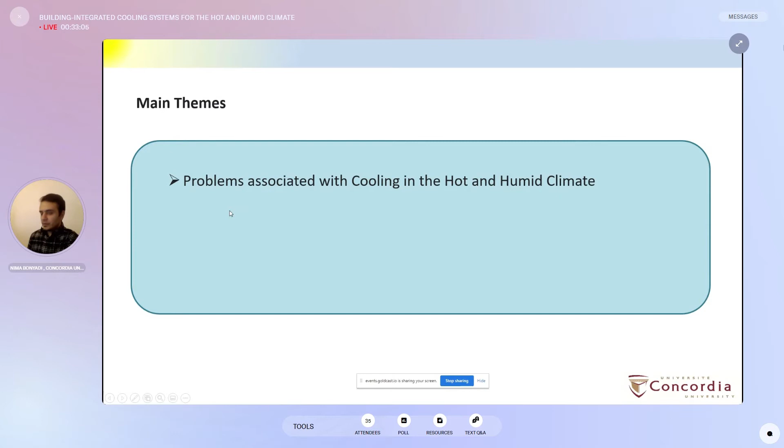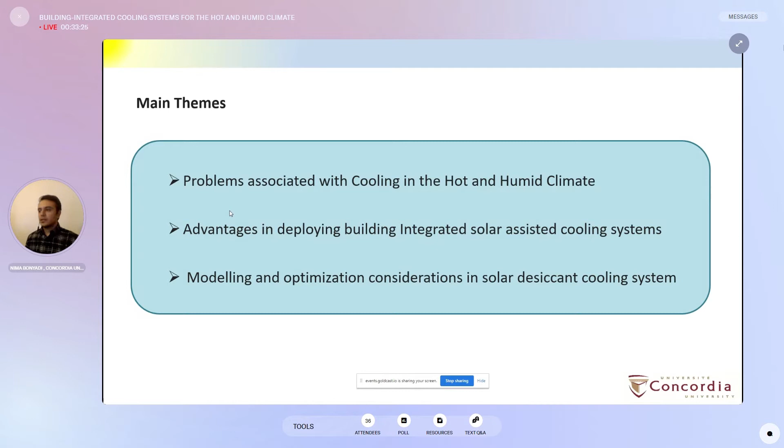Today I want to talk about building integrated cooling systems for the hot and humid climate. Our talk has three main themes. First, I talk about the problems associated with cooling in the hot and humid climate. Then I talk about the advantages in deploying building integrated solar-assisted cooling systems. And in the end, I talk about the modeling and optimization considerations in solar desiccant cooling systems. I will also talk about the recent projects in our research center. So let's start with the first section of our presentation today.

The first question is, what is the building's role in clean energy transition? According to statistics, the building sector accounts for 28% of CO2 emissions in 2017, and its emissions grew more than 25% since 2000. But we have a solution: efficient air conditioning can reduce power capacity needs by 1,330 gigawatts by 2050, which is significant.

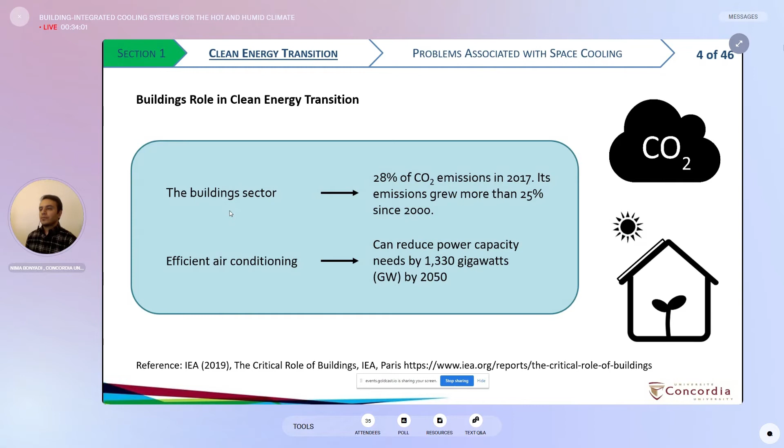This figure shows the world energy consumption for space cooling in buildings. As you can see here, from 1990 to 2016, the share of consumption is growing fast, and it is almost entirely in the form of electricity. Also, the share of energy use from space cooling has risen from 3% to 6%.

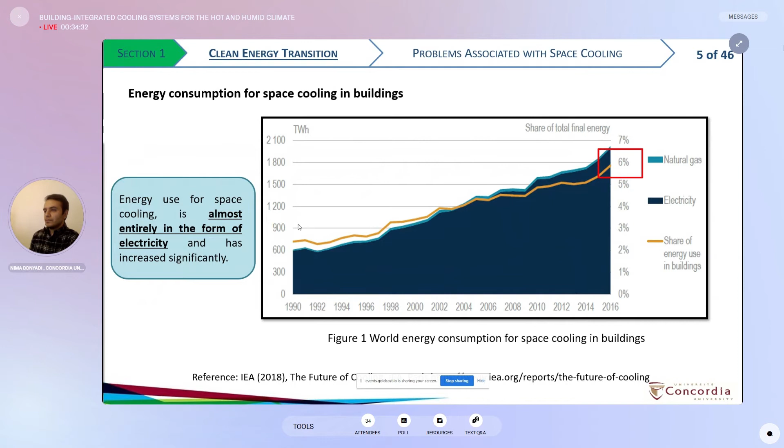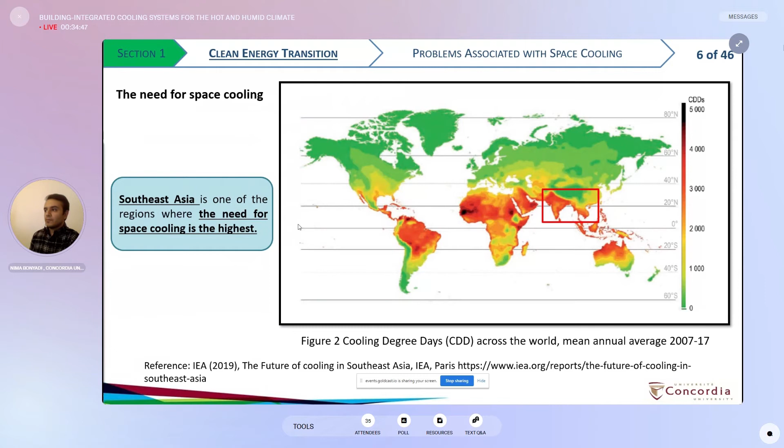This graph shows the cooling degree days, the mean annual average for different countries and locations worldwide. Here you can see that Southeast Asia is one of the regions where the need for space cooling is the highest. Especially India and Southeast Asia account for the largest share of the growth in CO2 emissions from air conditioning, and it will follow the same trend up to 2050.

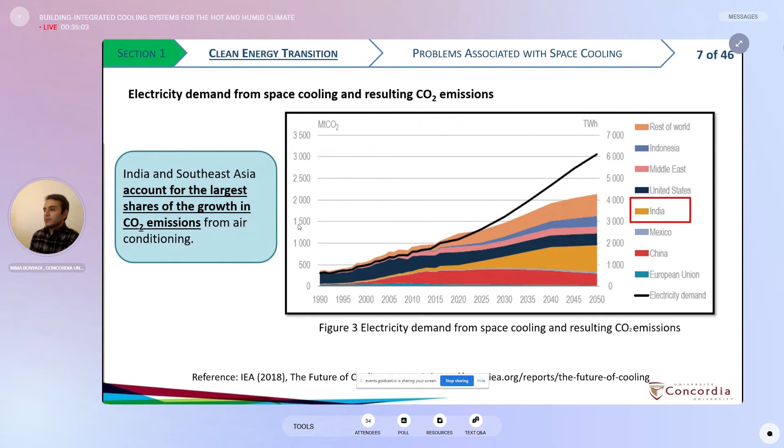This figure shows the building electricity demand by end-use applications. We have different end-use applications like appliances, lighting, space cooling. Right now, in 2016, appliances have the main share of end use. But by 2050, space cooling will be the single largest user of electricity in buildings.

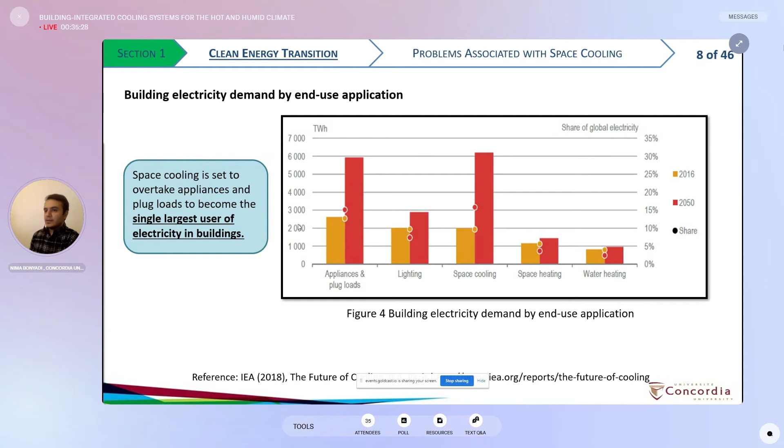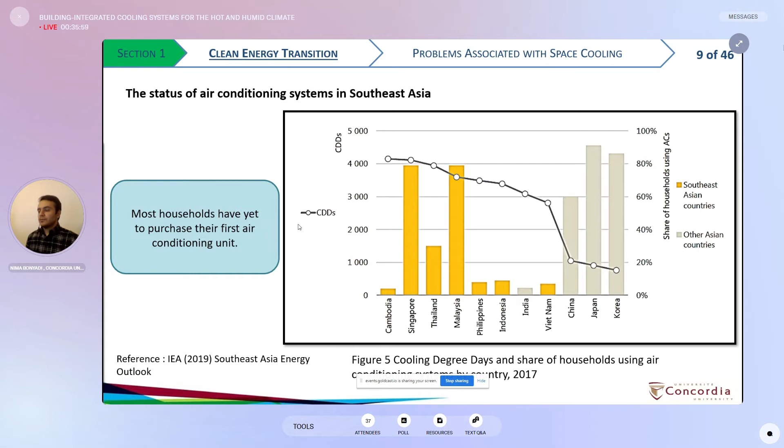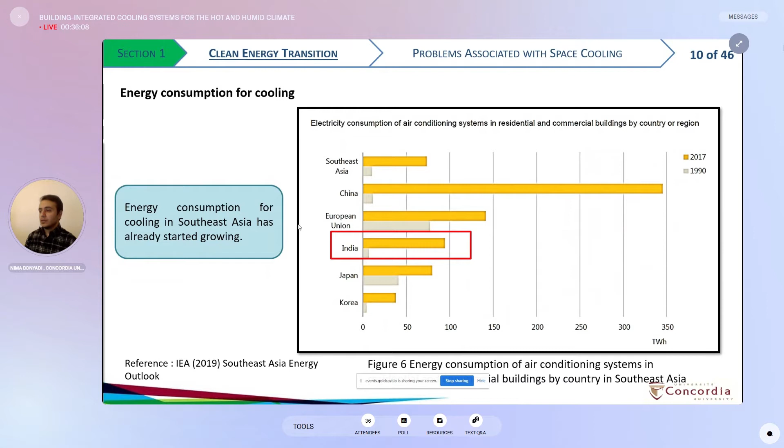But the trend is not the same for every country. As you can see here, the countries with even higher cooling degree days, shown in the line, don't necessarily have the highest amount of household air conditioning systems. Even countries with lower cooling degree days have a much higher number of cooling units in their apartments or households. But this trend is changing, and from 1990 to 2017, the electric consumption of air conditioning has already risen.

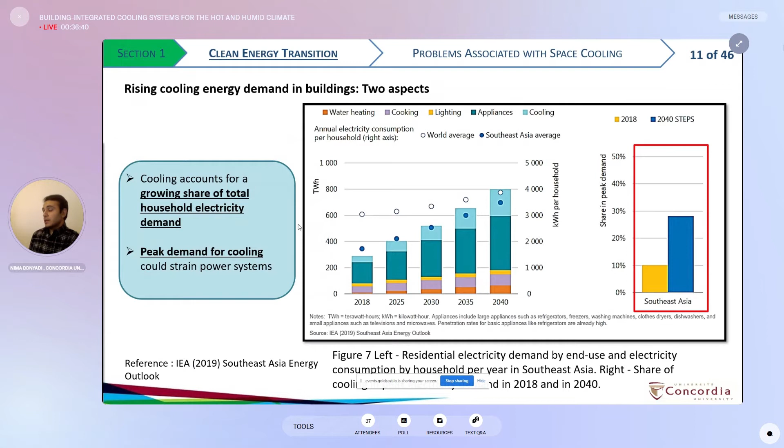There are two aspects when we want to consider the cooling energy demand in buildings. One is total household electricity demand, which, as you can see in the left figure, is rising. But the most important point is the peak demand for cooling, which in Southeast Asia is going to almost triple from 2018 to 2040.

Now let's take a deeper look at the situation in the Indian climate as an example of a hot and humid climate, and I also want to talk about the challenges and opportunities in this climate. In figure 8, you can see different climates in India, from cold to hot and humid. In the figure in the middle, the hot and humid climate region is highlighted. The hot and humid climate is defined as a region which has a monthly temperature above 30 degrees with relative humidity above 55%, or a mean monthly temperature above 25 and relative humidity above 75%.

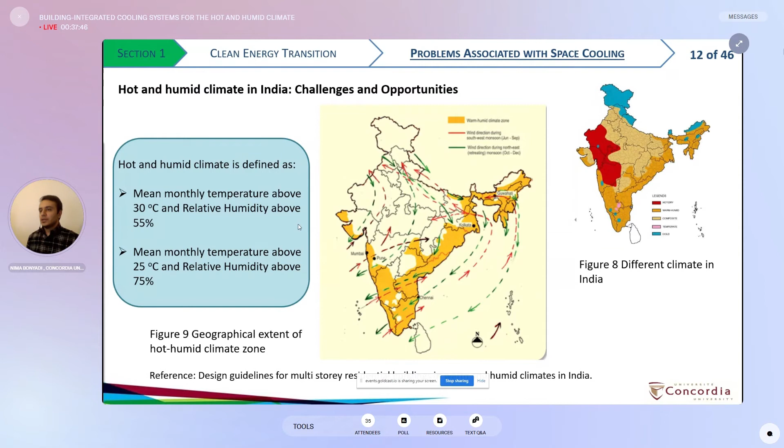And here we have different cities that have been considered in this study, Chennai, Pune, that are located in that region. And here you can see the average maximum and minimum dry bulb temperature for this region. You can see that most of the time during the year, the maximum dry bulb temperature is more than 25 degrees, and even the minimum temperature for a city like Chennai doesn't go below 20 degrees on average.

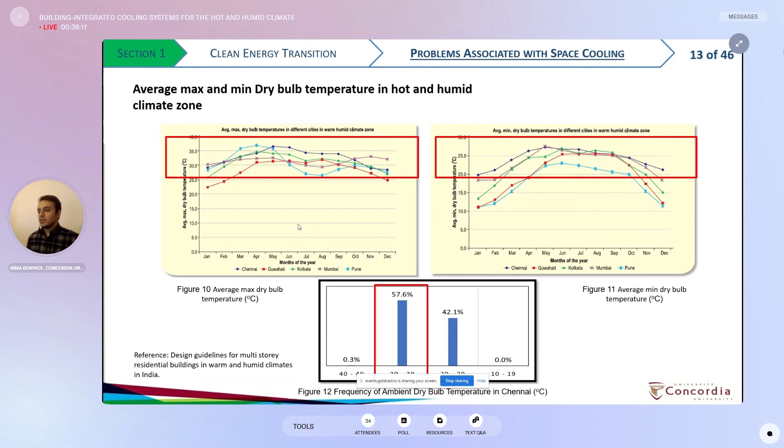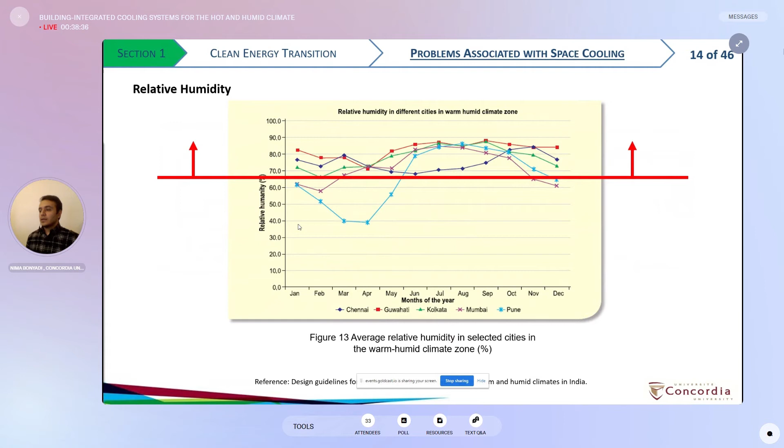Here we have the frequency of ambient dry bulb temperature in figure 12, and you can see almost 60% of the time the temperature is more than 30 degrees, which is very significant. Another challenge or problem is relative humidity, which, as you can see here, is more than 65% in almost all of the cities during the year, and this causes many problems for air conditioning.

Do you hear me clearly? Very well. Okay, perfect. Just to make sure.

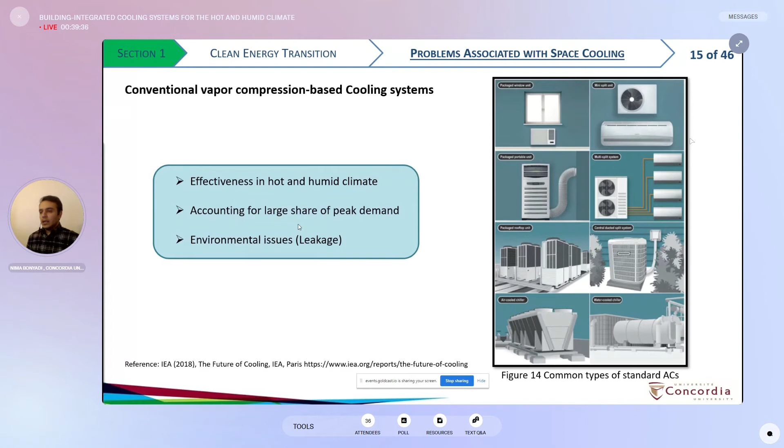So we have different conventional vapor compression-based cooling systems, which are commonly used in the market and industrialized. But they have problems because they cannot deal with humidity separately, and that causes more energy consumption. Another problem is that they account for a large share of the peak demand that I mentioned previously. And also they can have environmental issues due to leakage, which can cause problems for global warming and the ozone layer. So I talked about the challenges.

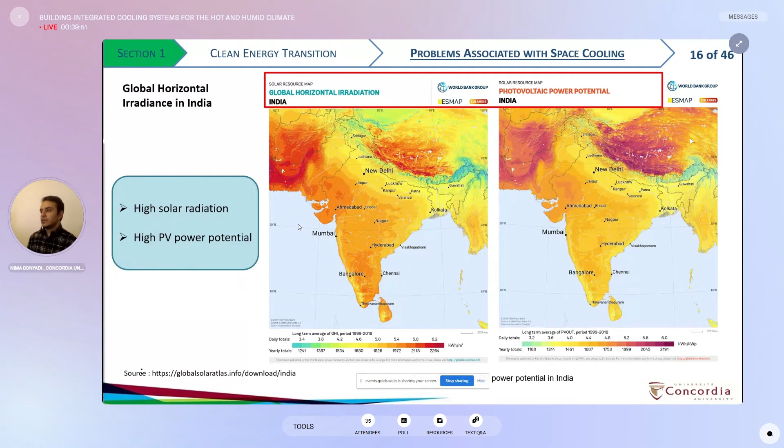Now, what are the opportunities? We can see in this figure that we have relatively high solar radiation, and also high PV power potential in Southeast Asia and specifically in India. You can also see in these figures that for about 30% of the time, we have global horizontal irradiance of 750 watts per square meter, which is very significant and can be used for solar applications.

And here you can see that in warm and summer months like March, April, May, we have high solar radiation. But in rainy months, July, August, September, we will have a lot of cloud cover, and that reduces the global horizontal irradiance, which should be considered in the simulation and in the design procedure.

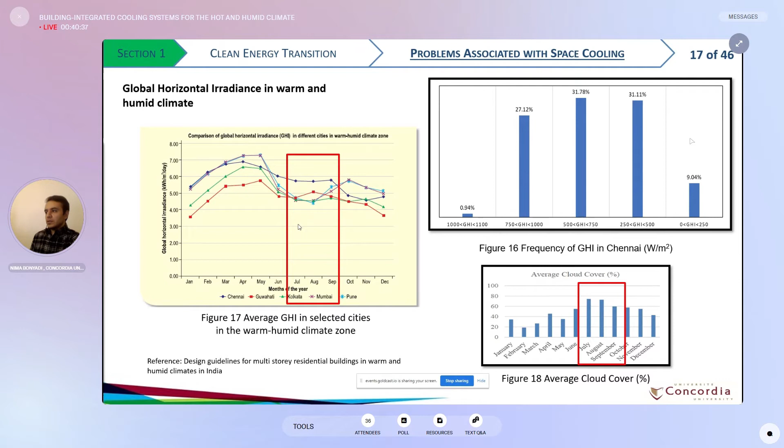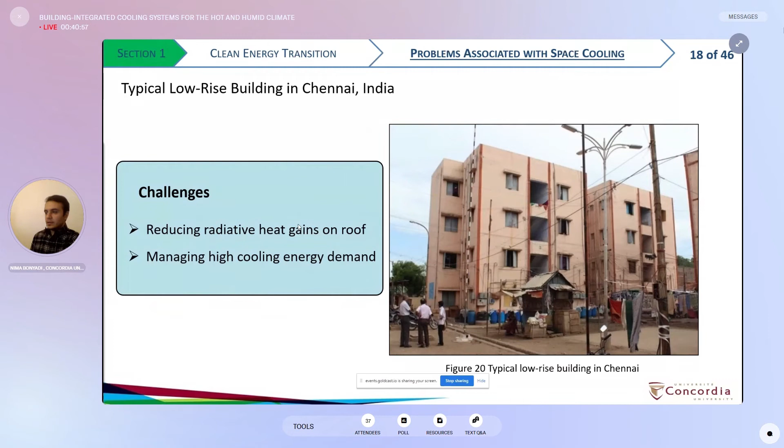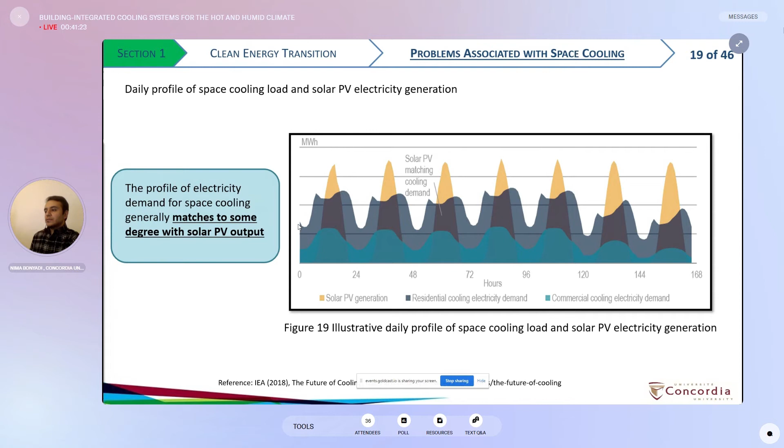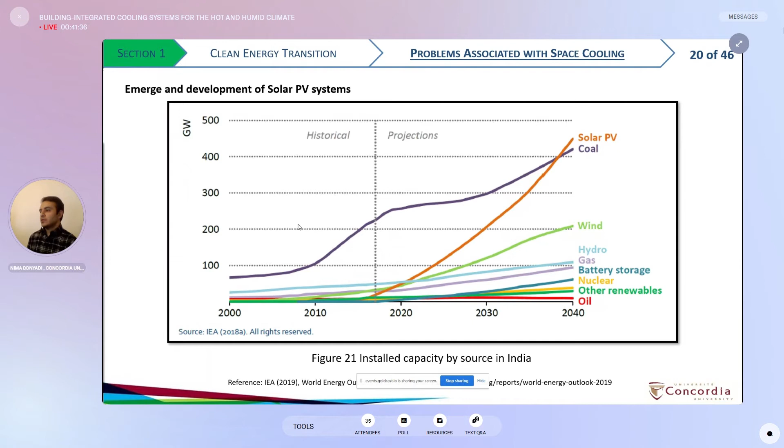And here you can see the development and emergence of solar PV systems; by 2040, solar PV is going to rise significantly in comparison to other energy sources and technologies. But the PV system can also be developed in a way that it can be better used. As you can see, solar PV systems get heat from the sun, and the surface temperature rises significantly, especially in hot climates. So we can take the heat from the surface and use it for different applications.

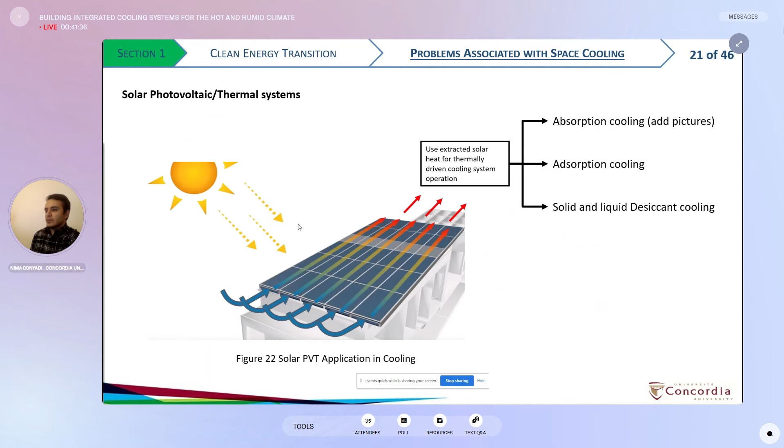In cold climates, it can be used for preheating the building, but in hot climates, since the temperature rises enough for cooling applications, the extracted solar heat can be integrated with thermally driven cooling systems. So we have recently developed systems. Some of them are working well and in operation, some of them are in research. We have absorption cooling, adsorption cooling, and solid and liquid desiccant cooling systems that can be considered.

The PVT system can also be integrated with a solar air heater system to further boost the temperature of the outlet air passing through the PV system. The advantages are that, first of all, it boosts the PV efficiency and outlet air temperature, since it reduces the temperature of the PV surface and increases the efficiency of PV electricity generation. It also reduces the auxiliary heat source requirement and reduces radiative heat gains on the roof. And the open sides facilitate natural ventilation.

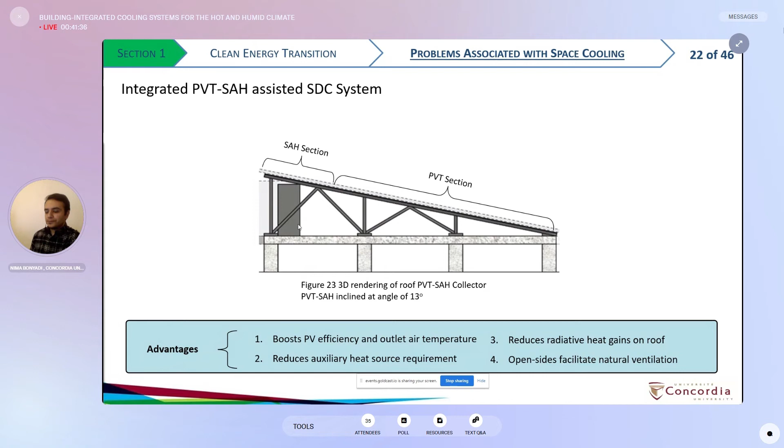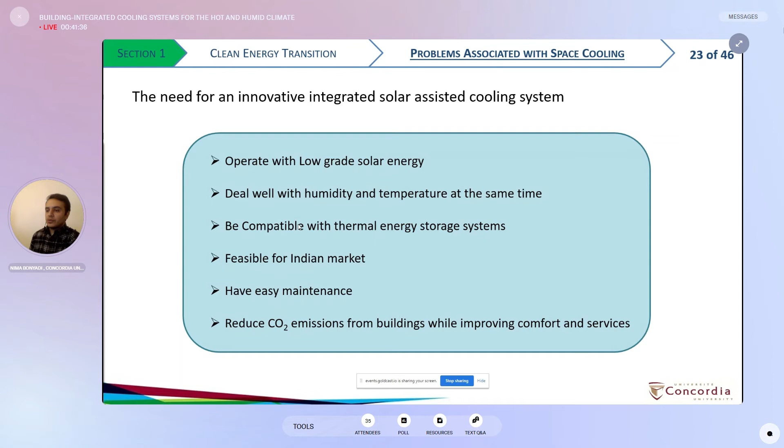So in conclusion for this section, we found that we need an innovative integrated solar assisted cooling system to deal with humidity and temperature for air conditioning purposes. The system should operate with low-grade solar energy, deal well with humidity and temperature, be compatible with thermal storage systems, be feasible for Indian and Southeast Asian countries, have easy maintenance, and reduce CO2 emissions from buildings while improving comfort and service.

Now I want to go over the solar assisted cooling systems that have been used in hot and humid climates. So basically, these systems are sorption systems, and they have a process of adsorption or absorption and desorption. For the desorption process, we need thermal energy, thermal heat, to do the desorption. And the regeneration temperature for this purpose varies for different technologies. For example, solar absorption systems have relatively higher requirements, like 110 degrees.

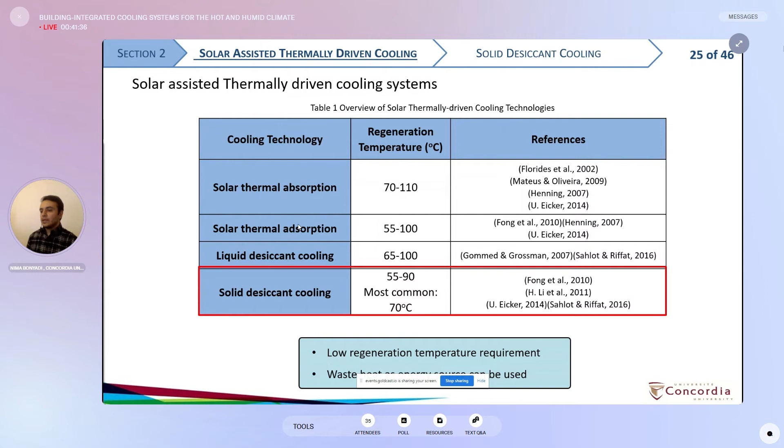It can even reach 200 degrees. Some materials, like silica gel, have relatively lower desorption temperature requirements, but other materials may have higher. Also, we have liquid sorption materials and solid sorption materials. So it's really changing. But for our purpose, since we want to integrate a PVT system with the cooling system, we consider the solid desiccant cooling system, which has relatively lower regeneration temperature requirements, mostly about 70 degrees. And we can use waste heat of the solar PVT system to integrate it.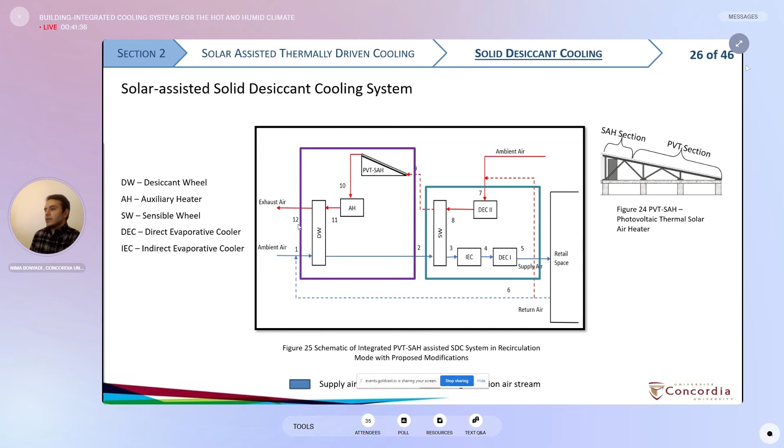There is a question: how do we ensure India doesn't emit CO2? What are the methods to minimize CO2 emissions in the building sector? Okay, as I mentioned, the building sector has a very main role in CO2 emissions, especially for cooling applications. By obtaining more energy efficient air conditioning systems, we can reduce our reliance on fossil fuels, which can consequently reduce the CO2 emissions of buildings. So this was the main point of using solar assisted cooling systems, especially for our applications in hot and humid climates.